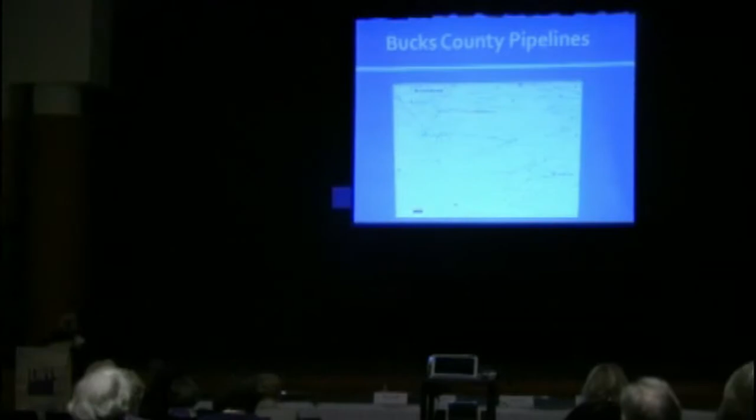Here you see some of the interstate lines in Bucks County. The blue lines represent those for natural gas, and the red ones for liquid products. You see they generally run east to west, because gas can flow in either direction.

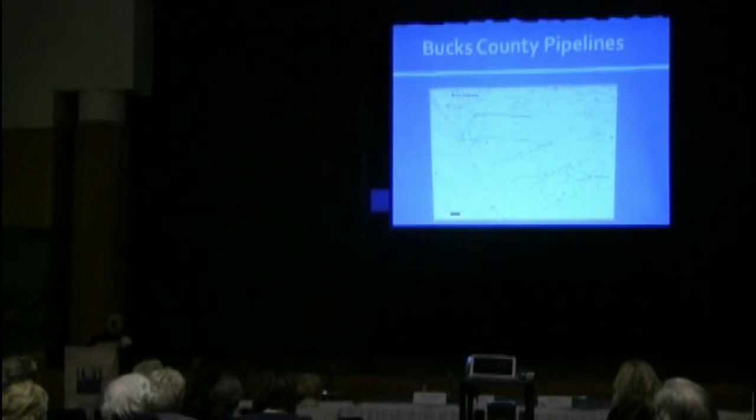These are some of the planned pipelines, and that little policeman on the slide is there to alert you that these are some items which you may want to spend your attention in reviewing. Planned pipelines is one of them.

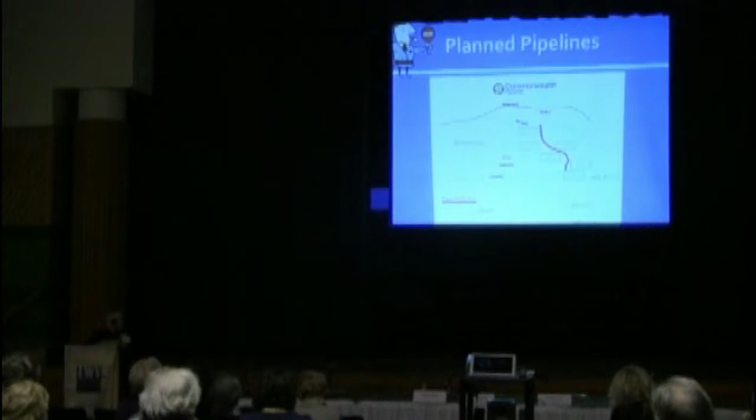Based on the increase in natural gas production, there are more transmission pipelines on the way. This is the best way to get the gas to the customer. Many of these new and expanded lines will be routed through our communities.

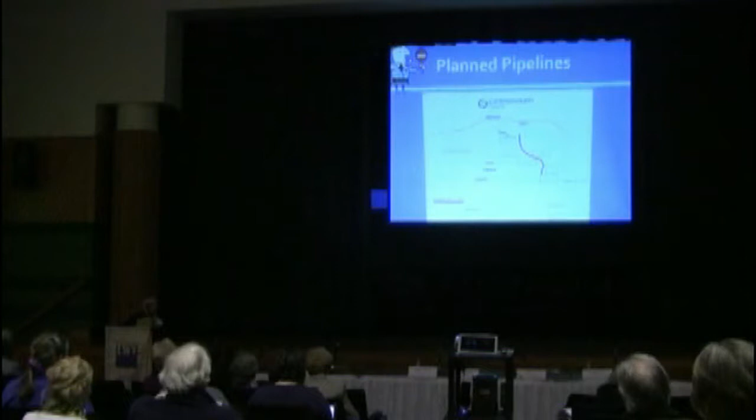There's also an East Side expansion project of the Columbia Pipeline in process that's upgrading facilities in this county as part of their efforts to transport natural gas from Pennsylvania to customers around the world.

There are also a lot of shorter lines that run from natural gas wells to other facilities. We don't have a map of all the natural gas lines, but we know there are well over 2,500 miles of them currently in the Commonwealth.

In this map, showing the lines in Bradford County, we see nearly 600 miles that have been completed, with more than 300 more miles planned. Most counties with shale development are developing a similar infrastructure.

In rural areas, these do not fall under state or federal jurisdiction. Thus, they are unregulated by government agencies for safety. There is no outside oversight of the construction process. And for your information, if you're out in the woods, you may want to be aware that there will be no smell if there is a leak.

There are also, part of the natural gas operation, pipelines that bring water to the site and can also be used for flowback fluids. Sometimes pipes are used to transport wastewater into pits or tanks for later disposal or reuse to frack other wells and other parts of the pad as needed.

These temporary lines, often made of plastic, can be in place for a year or more. They are also unregulated and could pose potential risks to land and water if leaks occur.

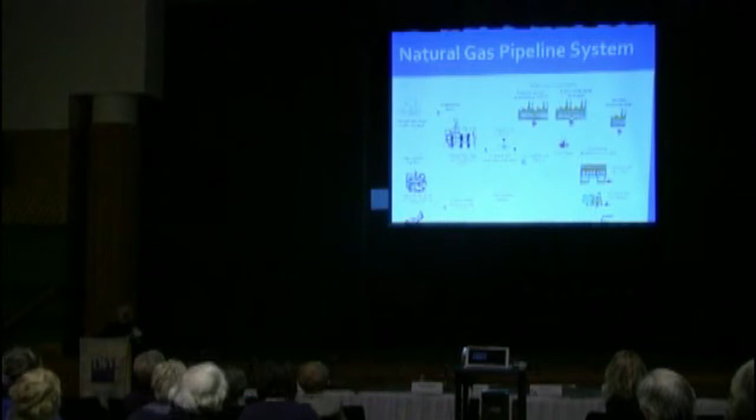This is a rural area of Pennsylvania where gathering lines are being built to carry gas from the wellhead to other processing plants or transmission lines. Sometimes these pipelines can be as big and operate under pressures as high as interstate transmission lines.

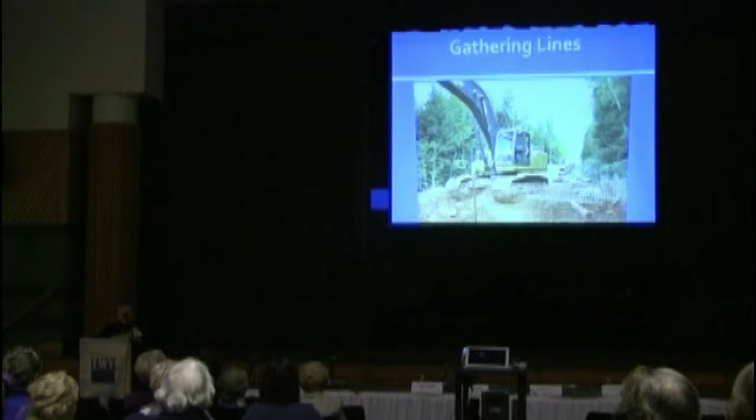These are compressor stations. These are large buildings holding huge engines and other equipment that regulate pressure and remove impurities to keep the gas moving safely and efficiently. They run 24/7, sometimes operate with a lot of noise and can also be a source of air pollution.

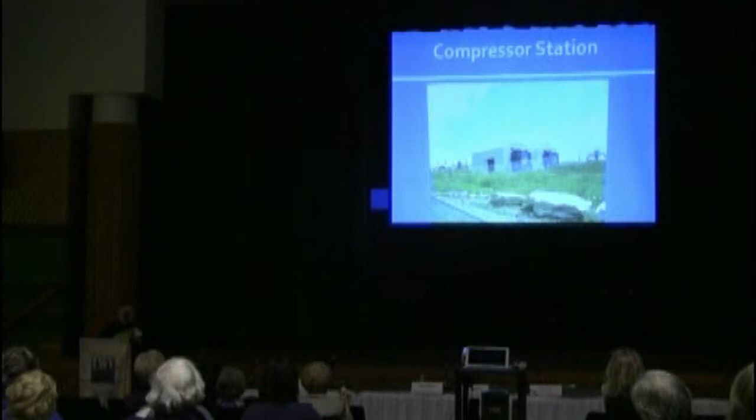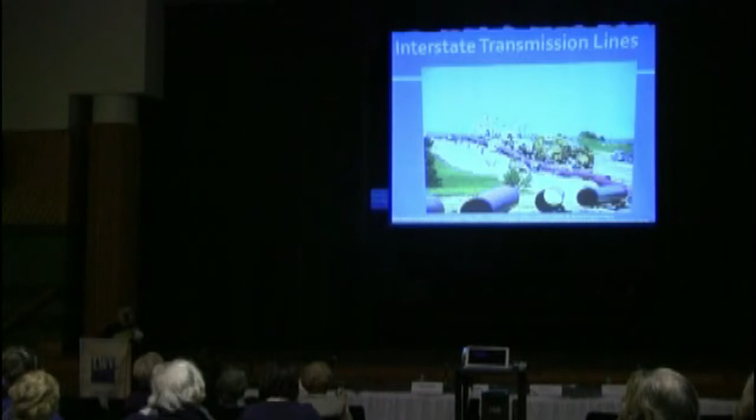Because the demand requires it, here are the large interstate transmission lines. They carry natural gas from one state to another. They can be large and operate under high pressures, as high as 1,800 pounds per square inch.

Control centers, or SCADA, which is an acronym for Supervisory, Control, and Data Acquisition facilities, monitor natural gas flow in pipelines. They can note if major leaks occur, and in many cases act to remotely shut off valves to stop flow and prevent major disasters.

The city gate is where pressure is reduced so that the gas can flow without problems from the larger transmission lines to the smaller distribution lines that run underground to our homes. This is where mercaptan, or that rotten egg or skunk smell, is added for safety reasons to give methane that foul odor that warns you of a leak.

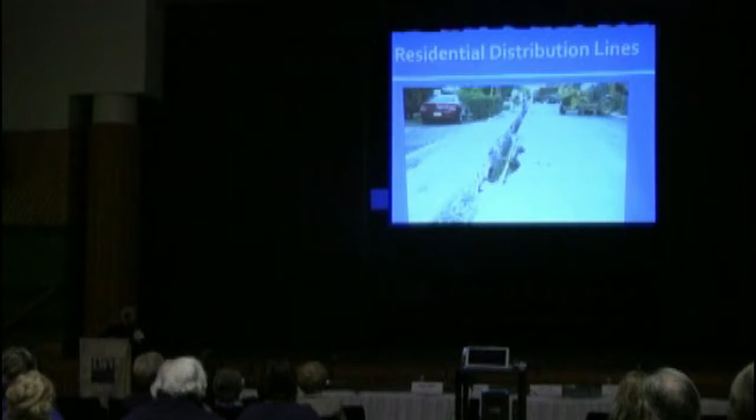To protect the public, emergency responders need to be prepared, and residents need to know and understand what to do in case they smell gas. Company plans show that safety and repair records are required to be on file with all government agencies. However, in Pennsylvania, they are not available to the public, even under the right to know law. As some of you may know, methane is more than 20 times more effective in trapping heat than carbon dioxide.

So, as you know, the League's mission is to encourage informed participation that guides policy decisions. We hope that what our speakers will share with you will make a difference.

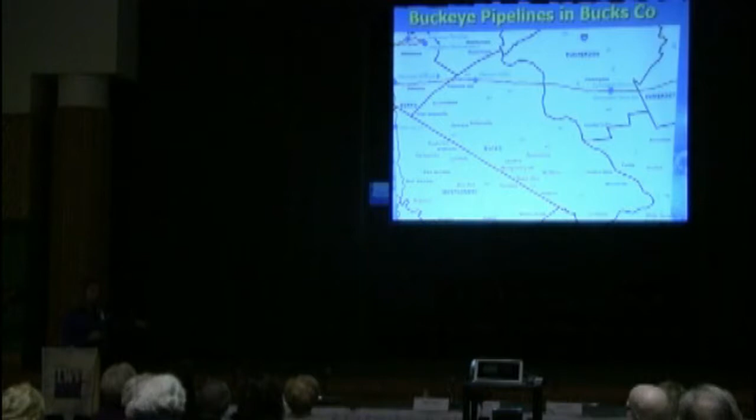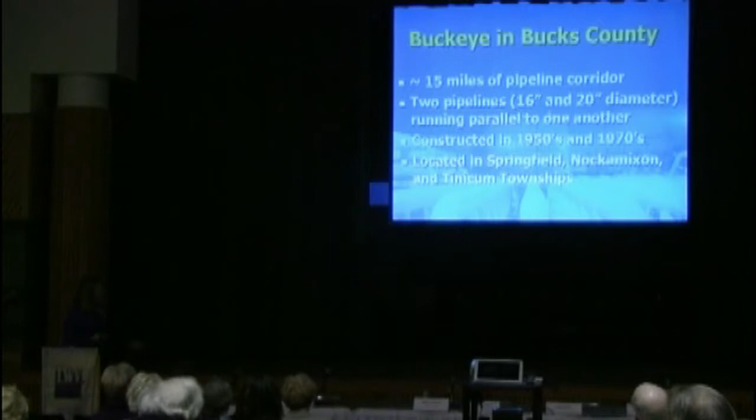In Bucks County, you can see we cross the northern part of the county. We are the red line. That is actually two pipelines that run parallel to each other between Macungie and Linden, New Jersey, about 15 miles in Bucks County. The two pipelines that run through are 16 inches and 20 inches in diameter. They were constructed, one in the 1950s and one in the 1970s. They're still running, so these are things that have longevity if they're operated, maintained, and inspected properly. We're in Springfield, Nockamixon, and Tinicum townships.

These don't show up very well at all, unfortunately, and I don't know the area well enough to tell you exactly what that would look like if I had better information. But we are here. I might just skip through this part a little bit. Those of you who are near us or have questions, feel free to talk to me afterwards and I can get you a little better intro.

But basically, in Nockamixon we run right behind Palisades Middle School, behind the school from the road you came in on.

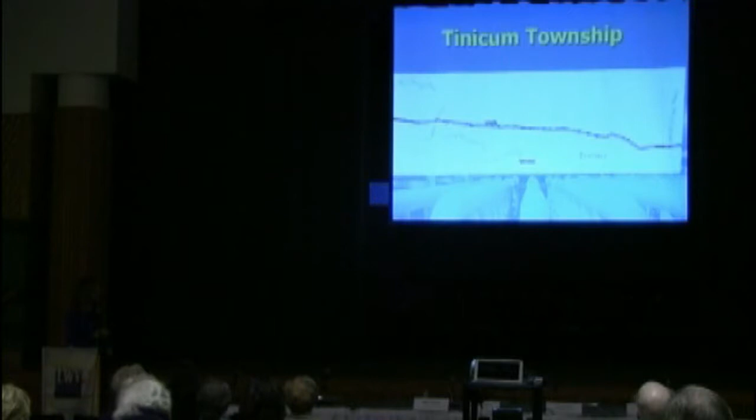One other resource I want to point out to you that is a resource for pipelines in your communities is the National Pipeline Mapping System. It is a website that is part of the Department of Transportation. It has resources that allow you to get shapefiles and other maps showing pipelines in your community. They don't go to a scale that you can see your house, but they will have roads and enough information for you to have an idea of what might be in your neighborhood.

A little bit about Buckeye's transportation system. As I mentioned, we are not affiliated with any major oil company. We don't own the products we transport, we are a middleman, kind of like FedEx or UPS, we just ship it. It's not our product, we are under contract with many parties to send these products around the country.

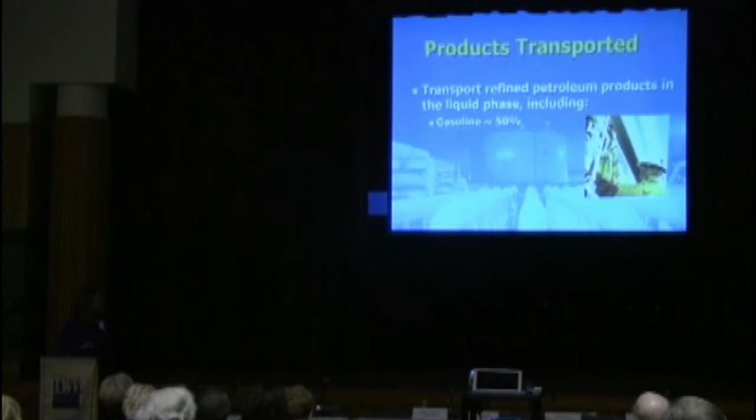Pipelines operate year-round, every day of the week, unless we're in the middle of maintenance functions. As I mentioned earlier, gasoline, jet fuel, diesel fuel, heating oil, and kerosene are our primary products, gasoline being the majority of that. We don't ship natural gas, which means if in any case of emergency you smell that rotten egg odor that Roberta mentioned, it is not us. Just be aware, if our product is in the vicinity, it's going to smell like gasoline, there will be some type of odor associated with that, just like when you're at the gas station.

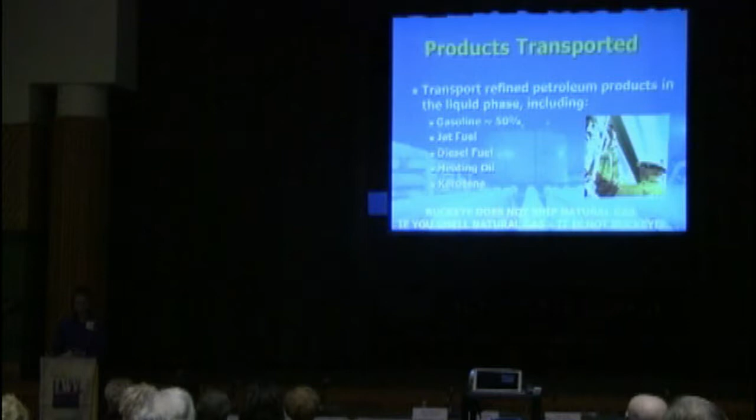Information about how the products run through the pipelines. On any given day, there will be lots of things in a pipeline at one time. We batch products behind each other. So we have a customer a state away that needs gasoline, that may be in the volume that we need to ship today. At the end of the gasoline, diesel fuel comes right behind it. These are pressurized lines, it pretty much stays in the order you put it in the pipeline until it gets to the other end. There's a little bit in the middle where it mixes.

We take that out, and some of it can be downgraded to a lower type of fuel that one of our customers can use, and the rest gets processed back to a refinery and turned into new product again. From an emergency standpoint, that's something we always have to be tuned into, because if there's a leak, it could be one of several products, and our operator will always be able to identify what it was at any given location. Emergency officials are also tuned into this because different products have different flashpoints and that type of thing you need to be aware of in responding to any potential incident.

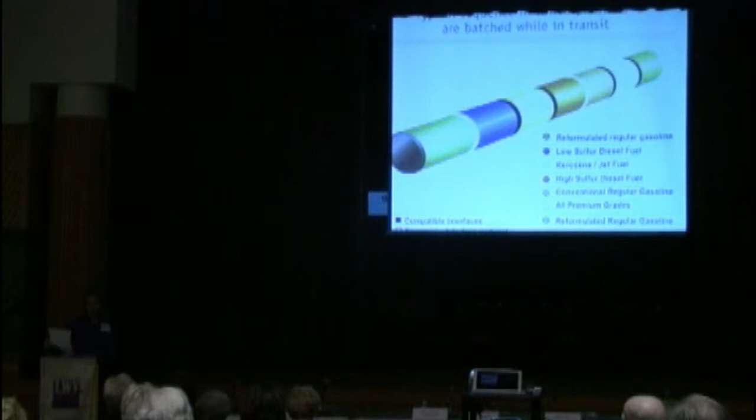We touched on this quickly earlier. Control centers are where the pipelines are monitored. Ours is in Breinigsville, right outside of Allentown. We have operators there around the clock watching SCADA systems for volume, temperature, pressure, and many other indicators on all of our pipelines.

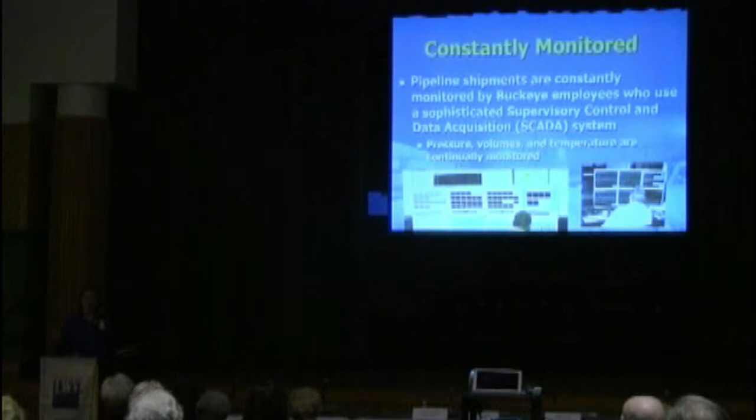These people are well trained to know what types of anomalies in that monitoring indicate the possibility of a problem. Especially at Buckeye, every single one of those people is trained from the first minute they walk in the door that it is 100% their right, obligation, and duty, if there's anything that looks remotely questionable, that they're not comfortable with, to shut it down. That is drilled into the culture of Buckeye, which, as someone who's not in that position to make the call, I'm still really appreciative of as someone who works for the company. There is no question that if there's a possibility of any issue, it's done.

As far as the pipelines run through your neighborhood, we have right-of-way patrols. The length of these lines is constantly monitored. We have air patrols that are our primary way of monitoring, looking for vegetation changes, pooling of liquids, etc. There's also valves, as we alluded to earlier, that can be shut off in the control center. Pilots fly these right-of-ways at least once every 2 weeks, some locations more so, to monitor ground conditions. They also look for things like backhoes sitting near the pipeline, to be aware of possible work that's being done that we're not aware of.

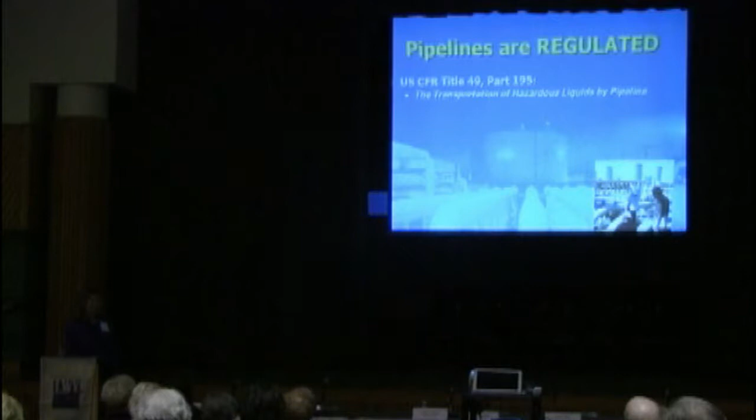Pipeline regulation: we are regulated through the Department of Transportation, Title 49.195, hazardous liquid pipelines, that's us. PHMSA, the Office of Pipeline Safety of the Pipeline and Hazardous Materials Safety Administration, is our regulatory body, and we are inspected every year by them.

There's lots of on-site inspections at our facilities. They monitor our operations on an ongoing basis. If there are questions about anything, they especially look at our records. As much as they're worried about the state of things, they very much inspect our records to make sure every single piece of required maintenance is done and documented to a T.

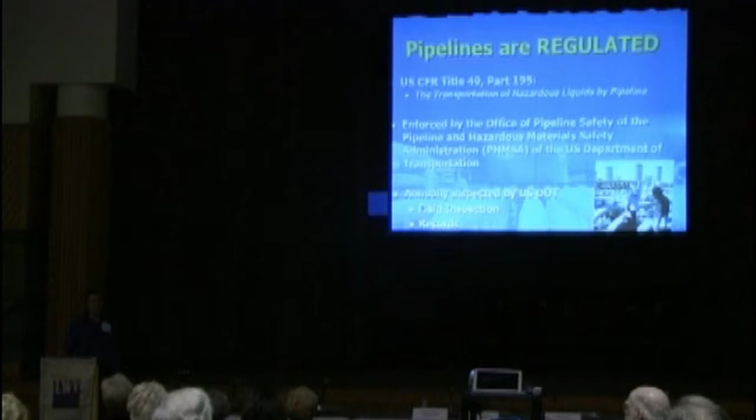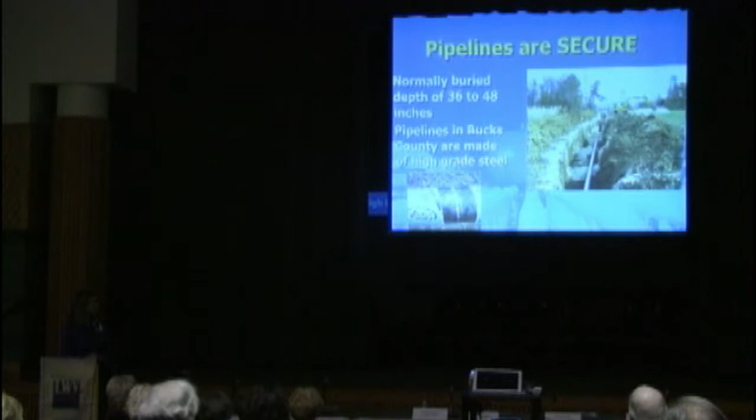In terms of the security of these lines, in general, they are buried 3 to 4 feet below ground, typically made of steel, and they usually have a cathodic protection system on them that prevents corrosion. Basically, it induces an electrical current which will corrode material other than the pipeline in case of water. It's also a way that we test to make sure the condition of the lines is intact.

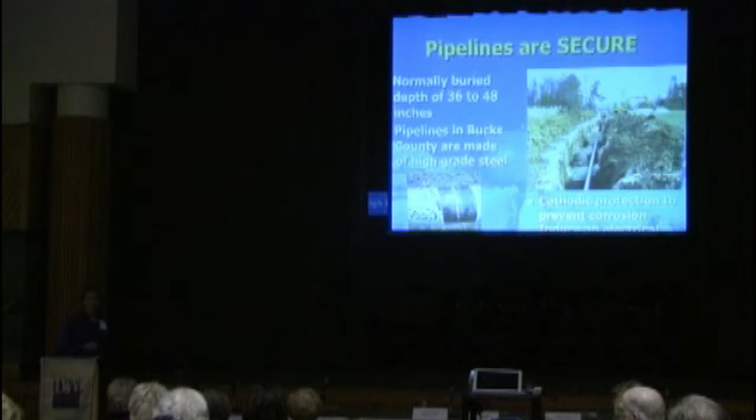Just a warning on the depth of those lines: sometimes they are much deeper, sometimes much shallower. We have lines less than a foot deep in certain places, which are all issues we try to address. But they are not always as deep as you might think. Lines were put in, say, 60 years ago, and erosion, farm fields tend to have soil changes over the years, so that's always a factor to keep in mind.

In terms of integrity, we are required to inspect our pipelines, and we would do so even if we weren't. The device we use is called a SmartPig. It's a highly technical instrument run through these pipelines, with sensors that detect any kind of changes in the surface of the pipeline - nicks, dents, scrapes, corrosion, that type of thing. These inspections are done at least once every 5 years.

Basically, this just flows in line with that series of products you just saw, and it will take tons of data about the condition of that line. Here's kind of what one looks like being put into a pipeline - that's probably, I'd say, 20-inch diameter, something along those lines. It has magnetic sensors all around it that are used to examine the inside of that pipeline for any anomalies.

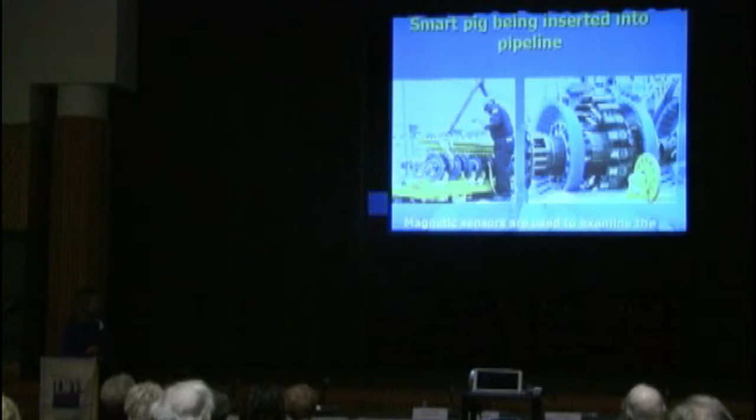Those are odometer wheels on the bottom of it that let us figure out exactly where in that pipeline it is, so that afterwards we come back and say something here didn't look quite right. We can find exactly where that location is on the ground, and every year we have tons of these where slight things trigger a duty on us to go out in the field, dig it up, inspect it, investigate what might have caused what we saw in the data, and repair anything that is questionable.

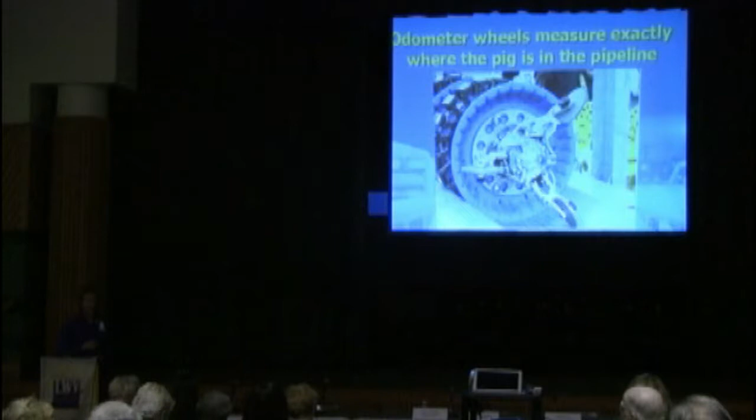Just a little bit about what we do in terms of communicating with the community. There are 4 key groups that we communicate with: the public, forums like this, emergency officials for things like emergency response, planning with them, going through drills just to be prepared, and local public officials, who we work with in terms of planning projects.

Frequently, one of the things I get involved in is developers who are building things near our pipelines. Sometimes we need to be working with developers or municipalities to help development stay clear of hazardous liquid pipelines, because they don't always go hand in hand. And excavators, of course, because any kind of construction near these lines is one of the biggest risk factors for an incident happening.

The messages we communicate with all of those people include: how to recognize a leak, the one-call number to call before you dig, what pipeline markers look like, how to communicate with our company, things you can and can't do within the pipeline right-of-way, and things to look for in case of a release.

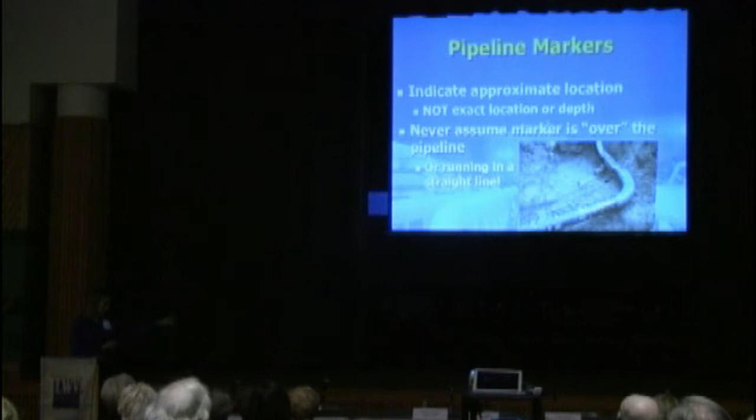They don't tell you the exact location, so they're not perfect, and they don't tell you the depth. This is just a reminder that these things are not always in straight lines, so if there's a marker over there and a marker over there, it doesn't mean connect the dots necessarily. That's kind of what our right-of-way looks like, or we would like it to on a given day. We try to keep them clear so that any issues can be spotted and that we have quick access.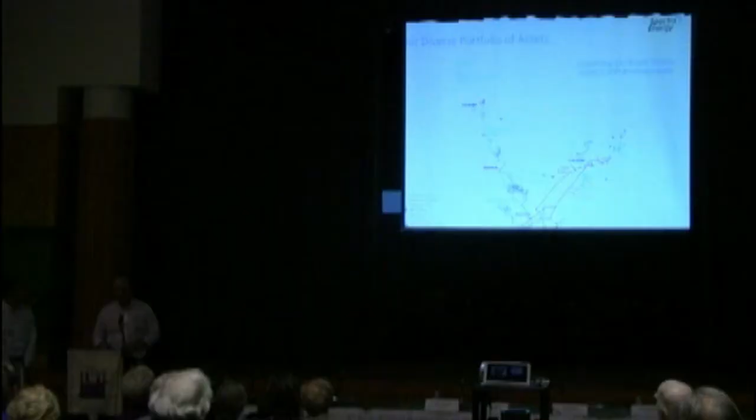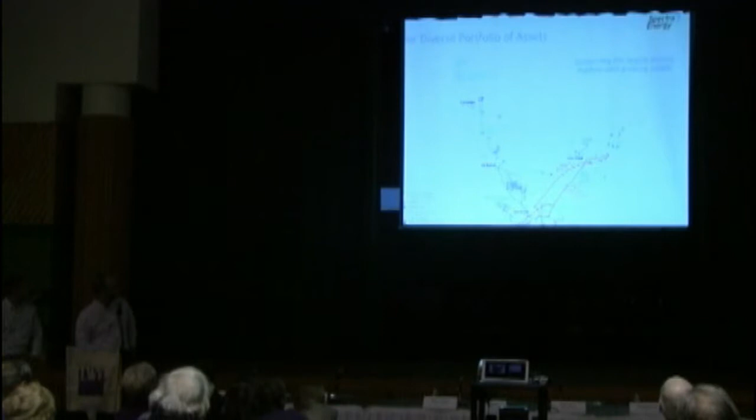Spectra Energy Corporation - our facilities are basically all throughout North America. We have facilities that run from Houston, Texas, up through Nova Scotia, Canada, and that's our natural gas system. We also operate in Western Canada and Central Canada, Ontario.

So basically, Spectra Energy, as an overview, is a natural gas transmission company. We own, operate, and maintain about 22,000 miles of natural gas transmission pipelines throughout the U.S. and Canada. We transport natural gas from the supply to the market. So kind of as Beth said, we're kind of like a FedEx, kind of like a UPS - we don't own the gas, we just own and operate the pipelines, and transport to local distribution companies such as PECO, UGI, things like that.

In Pennsylvania, we're known as Texas Eastern Transmission. Some people may know us as Texas Eastern Transmission. We've been in Pennsylvania since the company started in 1947. The pipelines were actually part of the War Emergency Program in the early 40s to get oil from the Gulf of Mexico and Texas up to New York. So Texas Eastern purchased those pipelines from the government in 1947 and turned them over to natural gas.

Our CRP system runs through the southern part of Pennsylvania - that's two pipelines, one a 20-inch high-pressure natural gas line, and the other a 36-inch high-pressure gas line. Our Penn Jersey system, which is up in this part of Bucks County, is a 3- and 4-line system. The lines range anywhere from 24-inch to 36-inch, and they operate at 1,050 psi. As you can see, we have over 2,000 miles of pipelines just in Pennsylvania.

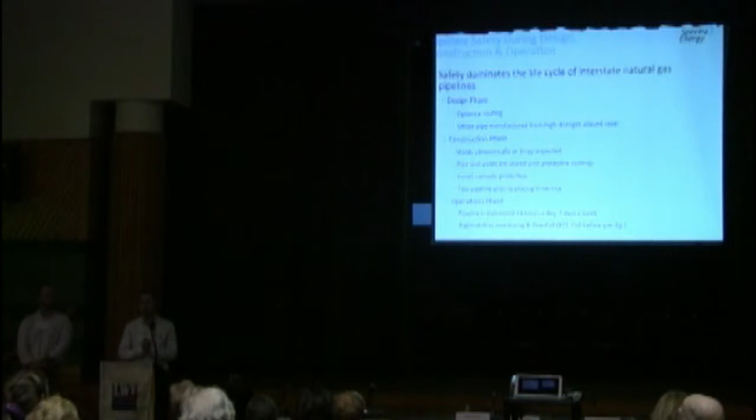The Federal Energy Regulatory Commission, FERC, is our regulating body. For most projects, we participate in FERC's pre-filing process, which is a voluntary process to get the community, elected officials, and basically all stakeholders involved in the permitting.

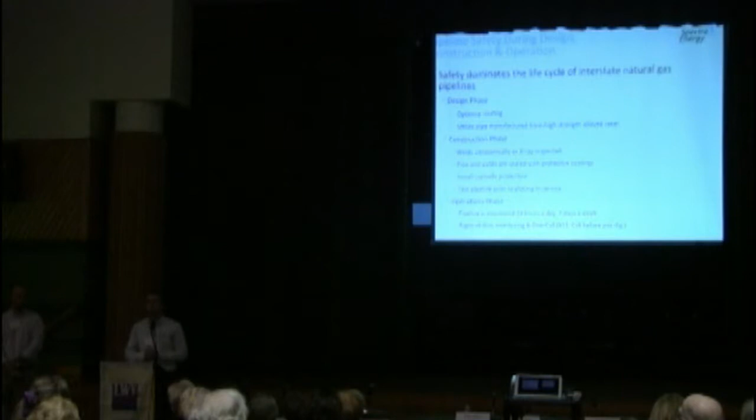When we're looking at new projects, just getting into the design phase, we don't route pipelines overnight. It's actually a long process, months, even years sometimes. It's important to optimally route the pipeline so we can manage our environmental footprint, and we like to work with stakeholders to address any issues folks might have.

Beyond routing, when we're actually purchasing pipe to install, we use high-strength alloy steel. We go out to the factory and have our own inspectors on site. The manufacturers have their own rigorous standards, but we send our folks out to oversee the pipe as it's being rolled.

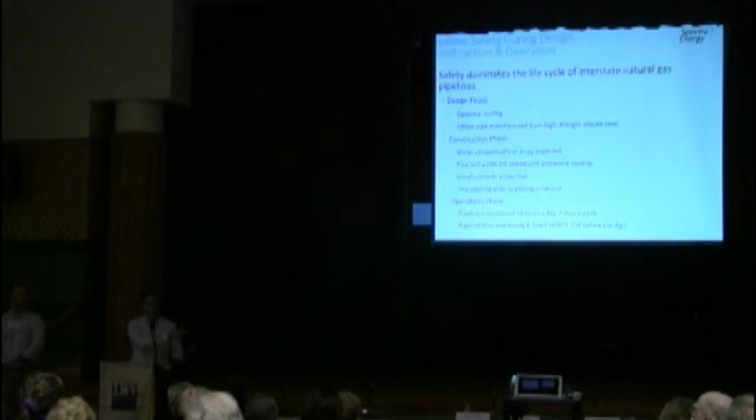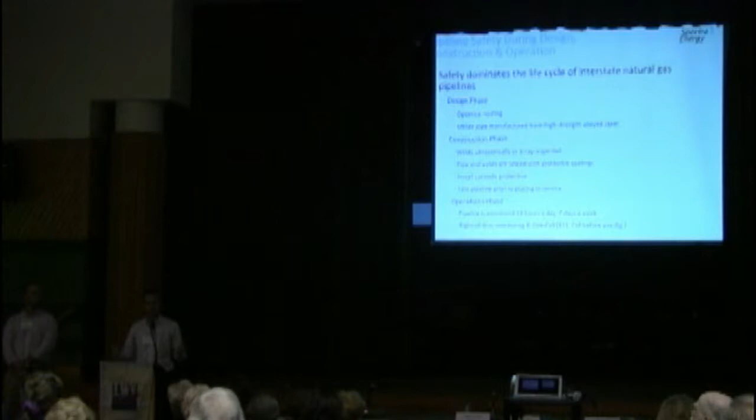As that pipe is rolled, they weld longitudinal seams, and those seams are ultrasonically, or X-ray, tested. Before that pipe even makes it out to the field, they test every weld to make sure it meets our strict standards, and if there are any issues, that pipe never makes it to us.

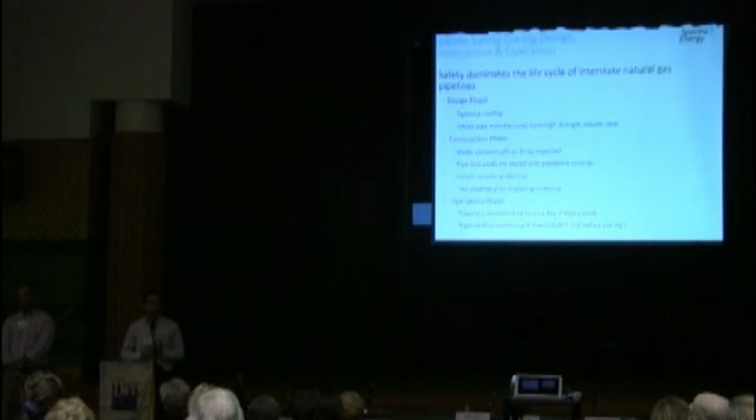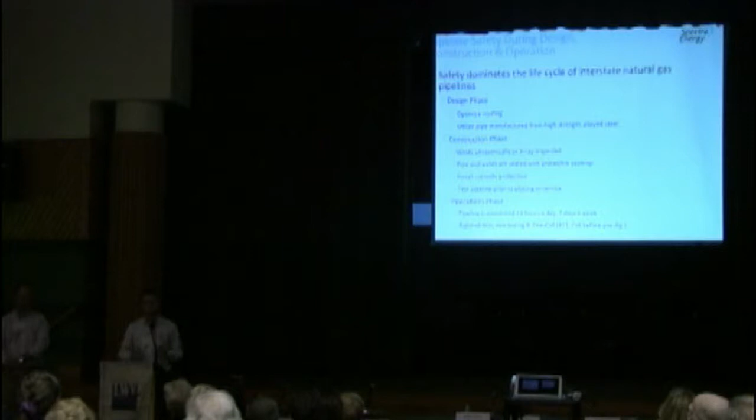Once that pipe makes it out to the field and we get to the construction phase, our welders are all tested before they're allowed to work for us. We make sure they know what they're doing, and beyond that, when they're welding, we X-ray and inspect all of the welds out in the field before we place that pipe into the ground.

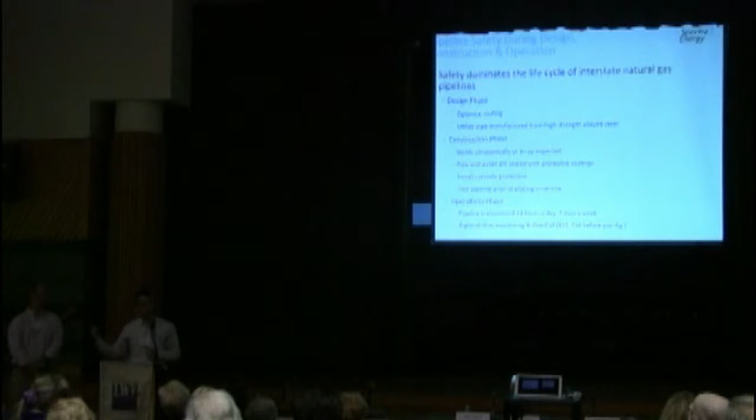Before we place the pipe into the ground, we also place a protective coating on the pipeline, and we install cathodic protection, which Ryan will explain later in our presentation.

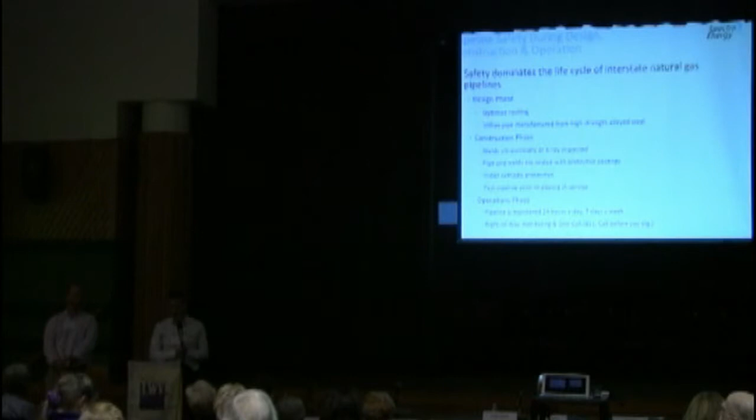Once the pipe is lowered into the trench—our pipes are a little different than product lines—they're buried at a minimum depth of 3 feet from the top of the pipeline to the surface. That's the minimum; pipes can be quite a lot deeper depending on circumstances in the area.

Once the pipe is in the ground, we test it. We hydrostatically test it, filling the pipeline with water and bringing it up to about 1.5 times the pressure the pipeline will operate at. The pipe has to maintain that pressure for a period of 8 to about 24 hours. If there are any issues, we'll identify them before we place the pipeline into service.

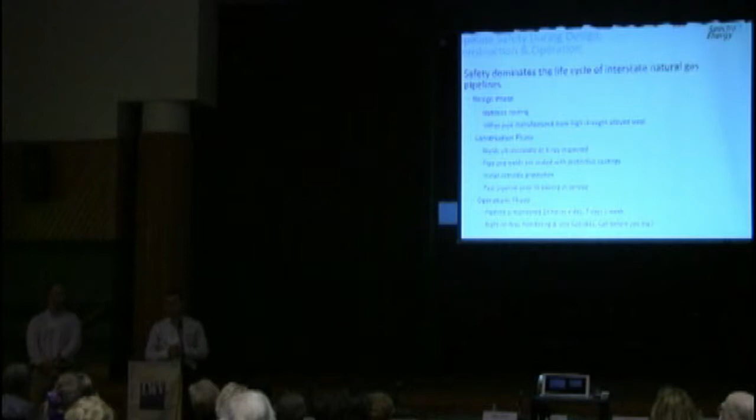Once the pipeline is in service, similar to Buckeye, we monitor it from our gas control center using the SCADA system. The pipe is monitored 24 hours a day, 7 days a week. If there are any changes in pressure, whether a spike or a drop, we have remote control valves along our entire system that let us close in the pipe with the push of a button, and we have folks like Brian and Pete who can go out and inspect the issue and figure out what's going on.

Beyond that, similar to Buckeye, our right-of-way needs to stay cleared. When I say it needs to stay cleared, you're not allowed...

We don't allow houses or barns on top of our right-of-way. You can still farm on top of it, still grow crops for the most part. But we need to be able to inspect the right-of-way, whether from the air or by Brian and Pete actually going out and taking a look, to make sure there's nothing happening on the right-of-way that shouldn't be going on.

That kind of dovetails into the 811 call-before-you-dig system, which we have a presentation coming up later to cover, so I won't get into it in detail. But as part of our own internal public awareness program, we work with first responders on a regular basis to make sure they know our presence in the area and that they're trained should anything come up.

Beyond that, anyone who lives near our pipeline receives mailers on a regular basis. I know we all get a lot of junk mail, but it's important that if you see anything from a pipeline company that mentions calling before you dig, hold on to it, because there are important phone numbers on there.

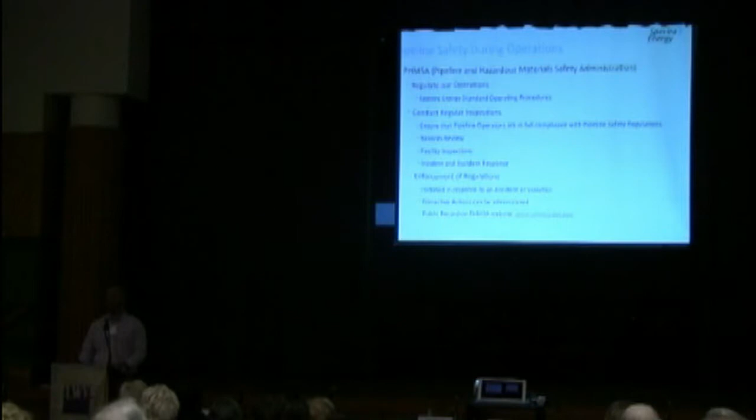PHMSA conducts regular inspections. We usually have at least one, but often multiple inspections throughout our company each year. A lot of times they'll do a large record review in our Houston office, and then they'll send inspectors out into the areas and do another thorough record review there.

They would come to an office like this area office where I work, and I'll sit with the PHMSA inspector for upwards of a week or two. We'll go through records and take facility tours. They can look at basically anything we have - the right-of-way, to make sure we have visible pipeline markers, and our standard operating procedures, to make sure we're doing what we say we're doing and documenting everything. So PHMSA is very, very involved in our operation.

PHMSA would also come out if there was any kind of incident or accident, and they'd be involved in that as well. They enforce regulations - if there's an incident or accident, they could enforce a violation upon us, or any company for that matter. If we're not living up to our standard operating procedures, PHMSA can apply a fine as they feel necessary.

On the PHMSA website, anything they find against a company is public record. You can go on PHMSA's website and they list everything going back to the 1980s, and I believe even farther - it's all public record. So if you ever want to take a look, you can see where pipelines are in your area with the mapping tool, and also see what pipeline companies are doing in the area.

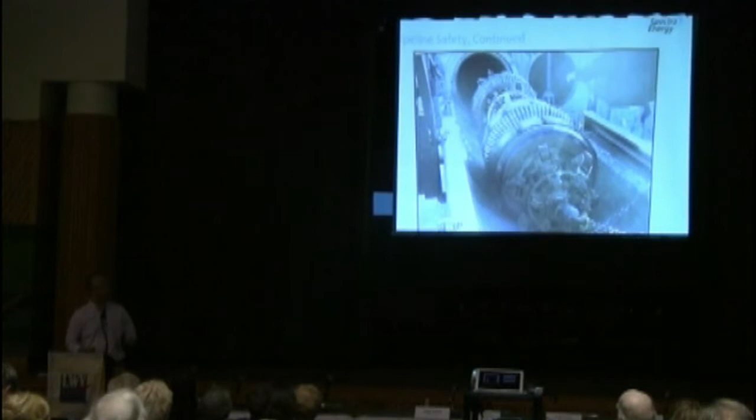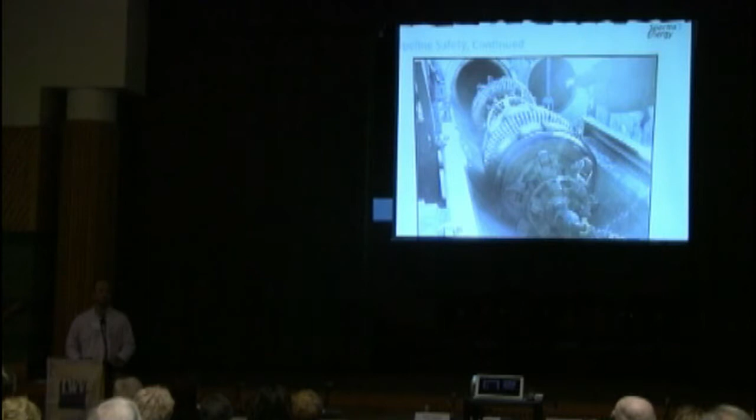What it does - Beth explained it, so I won't go through it in detail again - but it's going through the pipeline checking for any corrosion, any indications in the pipeline. If there's anything there, we'll go inspect it. Our pigs can be run three different ways.

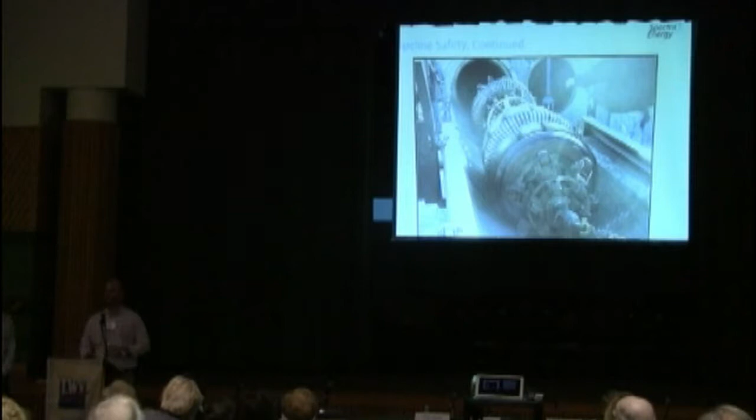They are run with natural gas, we can run them with nitrogen, and we also have certain facilities where we do a wireline pull. Basically, we set up a big truck and air compressor on one side, hook a wire to the pig, and pull it over to the other side. A lot of times we'll do that with certain crossings at rivers, so most of our lines are run with natural gas.

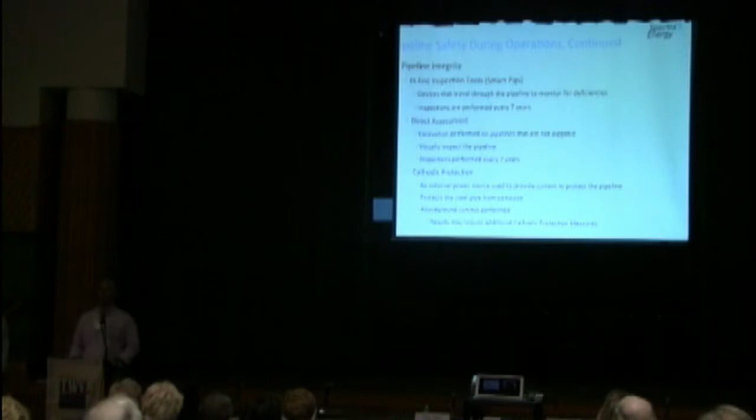We also have a direct assessment program. Not all of our underground lines are pigged. We have certain valve sites and meter stations that have smaller pipe crossing between the lines, anywhere from 6-inch to 10-inch or 12-inch, that a pig can't run through, so a smart tool can't get data. What we actually do is dig these sites up, visually inspect and put our hands on the pipe, remove the coating, inspect the pipe, and then recoat it. So for lines that are not piggable, that's how we take care of that.

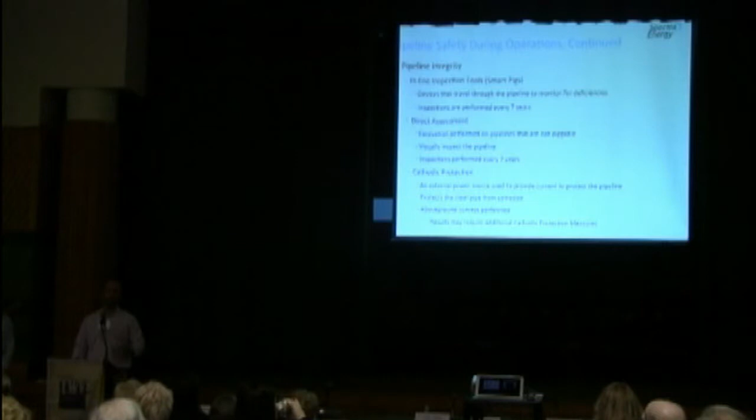As far as our cathodic protection goes, we touched on that a little bit. We're checking the pipe, protecting it from corrosion, protecting the steel from corrosion. We also do above ground surveys where we can check the coating on the pipe, and from that data we'll go out and make any repairs if we have to, and add other cathodic protection if necessary.

No, our presentation's a little shorter than best. We thought the Q&A was part of our 15 minutes, so we'll stick around and answer any questions anyone might have about the presentation. Thank you.

So I guess we have 10 minutes.

Our next speaker this evening is Faith Zerbe. Faith is a member of the Delaware Riverkeeper Network, and she's been part of that since 1999. Prior to that, she spent a number of years as an assistant staff scientist with a private environmental consulting firm performing natural resource damage assessments related to oil spills. She assisted with the development and planning of habitat enhancements and restoration projects to compensate for natural resource impacts and helped assess environmental impacts from oil spills. Faith directs the Delaware Riverkeeper Network's monitoring program, and she's responsible for water quality data analysis, monitoring study designs to bolster the Riverkeeper's science, advocacy, and legal work, and recruiting, training, and maintaining a strong citizen volunteer monitor team throughout the basin. Faith has a Bachelor's of Science in Biology from Ursinus College, so she's local all the way. So welcome, Faith, please.

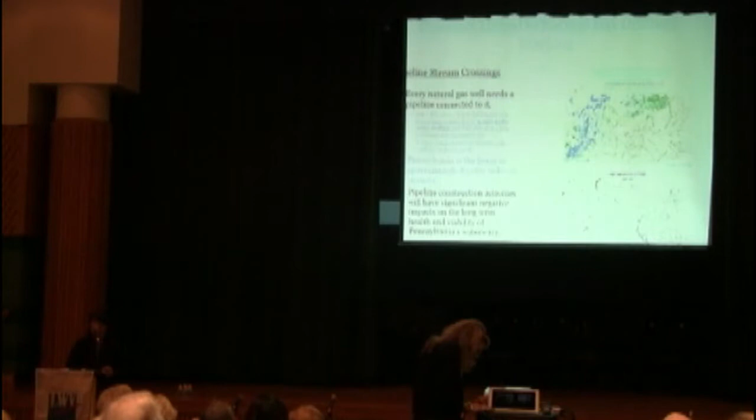And 2,907 wells were drilled that year. During that time, the state agency, the DEP (Department of Environmental Protection), detected 4,382 violations during their inspections. Again, these are just numbers that come from the DEP.

Because Pennsylvania has more stream miles than any other state—over 83,000 stream miles—as linear pipeline projects get cut across the basin, whether gathering lines or large interstate lines, there are a lot of wetlands and water bodies that get cut through and have to be crossed in some manner. So we have a lot of concerns at Delaware Riverkeeper Network that it's done in a way that limits the harm as much as possible.

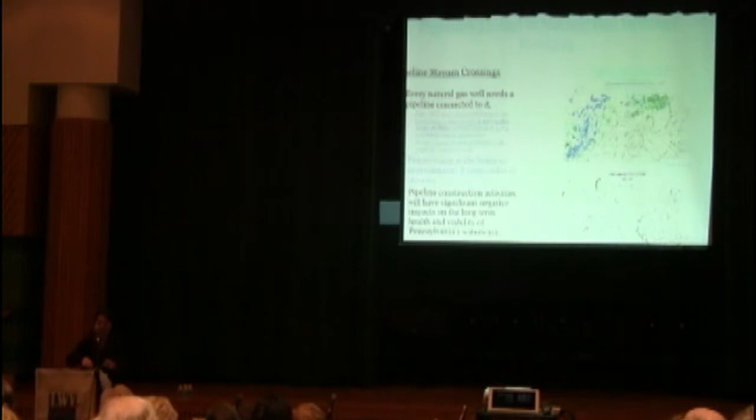This again is the Delaware River Basin, over 13,000 square miles. Here's Trenton, here's Philadelphia. The headwaters start up in Hancock, New York, and we're drinking water supply for over 17 million people, which is why we really care about how pipelines and gas drilling commence or do not commence in the Delaware River Basin.

Part of 4 states—you can't see this very well, but the reason the Delaware River Basin Commission and others were concerned about drilling is because there's basically a line right here, and all of this area of the watershed has Marcellus shale underneath it. Even where we are here in Nockamixon Township, I believe it's the Lockatong Formation as well. A lot of the drillers will go underneath—they're going into Utica, they're going into other shale layers as they look at this unconventional way of drilling.

So there are a lot of places that could have drilling eventually. But because of this, as biologists, as people working on watersheds, if we don't protect our headwaters, if we don't protect our forests, we're not going to have water to drink. So we had a very big concern with gas drilling and how it would proceed, if it would proceed.

So we have this map online because what we always struggle with at Riverkeeper is trying to figure out where all the pipelines are—there's a lot. Roberta and some of the other representatives showed some lines of pipelines, but we can never really see a very good map of where things are specifically. What this map shows is essentially there are about a dozen or over a dozen large interstate transmission lines, either proposed or already cut through the Delaware River Basin, just since the unconventional shale drilling began. There's a lot of concerns, and because they are so large and so vast, it's hard to get your head around these projects.

I don't live in the drilling territory—some of you are from the drilling territories, dealing with gathering lines and much more infrastructure than what we deal with here in the Delaware River Basin. But it seems even overwhelming for just the interstate lines. That's our perspective with all the lines coming in or proposed, just trying to keep track of them, keep up with them, and comment when we can.

The other thing I wanted to point out here too—am I really loud and yelling at you? Okay.

The one thing I wanted to point out is segmentation, which pipeline companies do very well. You can see it right here. Pipeline companies will come in and do segments, maybe 9-10 miles of a pipeline segment at a time. Here you'll see red, then yellow, then red, then yellow, then red, then yellow.

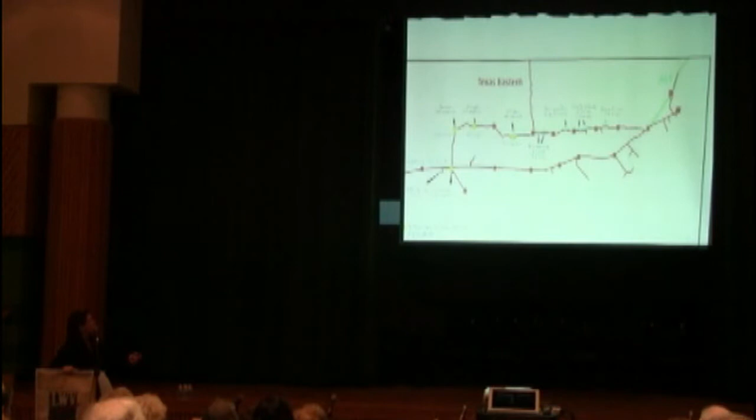So I'm just going to scroll through here. All right, so here are our volunteer monitors. Again, Delaware Riverkeeper Network is a grassroots group, we have a watchdog component. I work with a lot of volunteer monitors. We would not be able to do what we do without incredible volunteers on the ground. When you're looking at a pipeline project, having landowners who live along the pipeline engaged and involved is really important - they know what to look for, they know what their rights are, and who to call when there's a problem.

So again, a lot of the pictures are going to be taken from volunteers who've taken pictures when they're out in the field. This is through High Point State Park, and I apologize, it's not real clear. This is a typical pipe yard, the pipes coming in on the trucks.

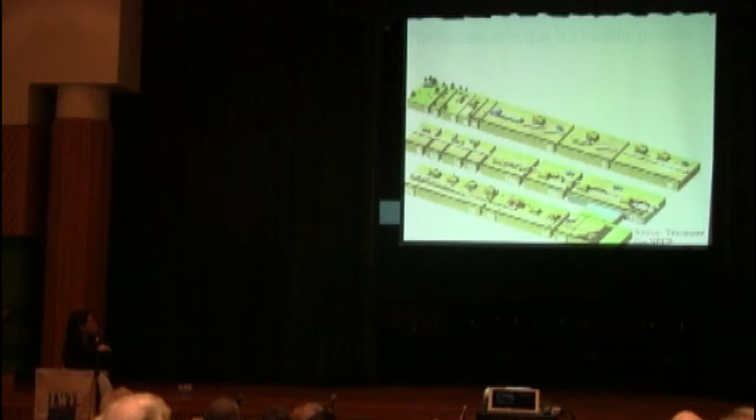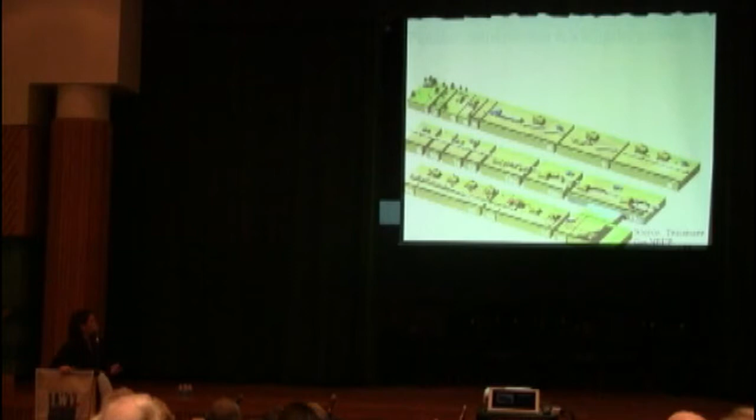So your typical construction sequence, again, you're going to start with tree cutting and tree clearing. There's trenching, there's blasting, depending on if you have a lot of bedrock. They have to pad the trench bottom, hopefully not with topsoil. There's stringing and bending of the pipe. Tennessee Gas outlines it in 18 different steps. So again, it's a process, it takes a lot of time. There's the welding, and then they put the protective coating on the weld. It all takes a lot of time, and it's actually pretty fascinating to watch.

Some of the things that we saw firsthand being out there in the field, we saw a lot of issues with environmental impacts and resources. You see a lot of pipelines moving into public lands and public areas, but what we saw was lack of signage. When the pipeline company goes through, they have to have wetlands delineations done. You can get wetlands delineation reports on the FERC website through the processing processes, but when you actually go out in the field, what you realize is things really aren't delineated. Even as wetland scientists, it's difficult to imagine if you're the person coming through and cutting trees, how do you know where the wetland is, or which trees, or where the right-of-way ends? Oftentimes when we were out there on sites where we had permission to go, it's really hard to understand, and we're right ahead of where they're cutting. It's just an interesting problem that we saw quite regularly with this pipeline construction project.

The other major thing we see, and we'll talk about methane in a little while, is a lot of issues with sediment and erosion. All of the wetlands and streams have to be crossed. This is your typical wetland crossing. They usually put timbers in the water, and that's considered a best management practice because it helps keep the sediment from getting really compacted. This is the travel lane, and here you'll see a wetland, or it might be a stream complex, and they've got the black fabric filter up too. In this case, they do not have the black fabric filter underneath. So these are the kinds of things that volunteers can be trained to visually look at in the field, to talk about and report the problems to the agencies.

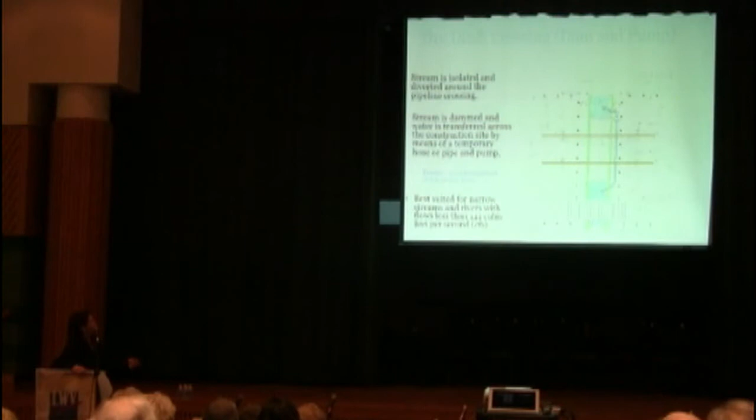This is difficult to see, but this is a diagram of basically a pump method. The pipeline goes across the stream, and the water is pumped through a pipe. Again, the idea is just to keep running water away from the construction site, so you don't have that sediment plume or sediment pollution. So that's one method to do it.

What we found in this project is they built these containments that were supposed to hold the water to do that diversion, to decrease the sediment getting into these high quality streams. But in most cases, they weren't using them. Partly what was happening is there's just a lot of flow in these streams going through, and as the flow goes through, if the straw bales aren't high enough, they'll overtop. So in a few instances where we could get access - we couldn't see everything all the time - we found these were actually being bypassed. So it looked good on paper, but it wasn't so good in reality.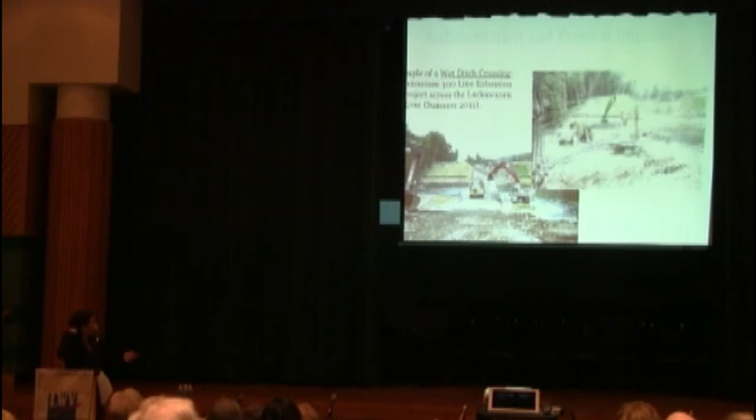And this is the beginning of the HDD entry pad. This is just an example, in the Lackawaxen. This was the 300 line, and you can see here this was a wet trench, and you can see where the sediment is pooling around the pipeline, in the water.

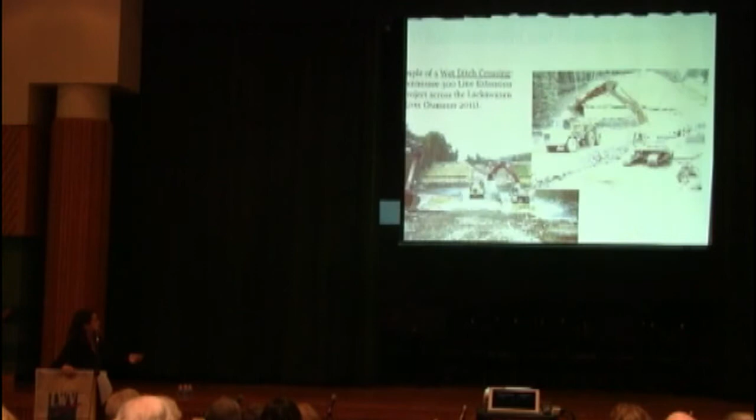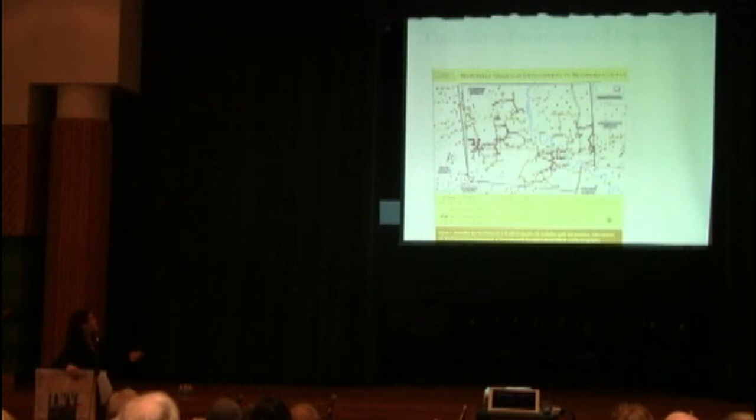So environmentally, we hope that they don't do this - we'd rather they go drill under. A couple more photos - I think I only have 3 minutes left. All right, then I'll end here.

This just shows you a cumulative impact for the Northeast Upgrade Project. It shows you, again, the linear nature of the pipeline, how many wetlands you have to pass through. I don't really have time to get into the public plans, but these are the different cumulative harms associated with pipelines, not to mention explosions. I have a lot more slides, but I believe I'm done for the evening, so thank you for your attention and time.

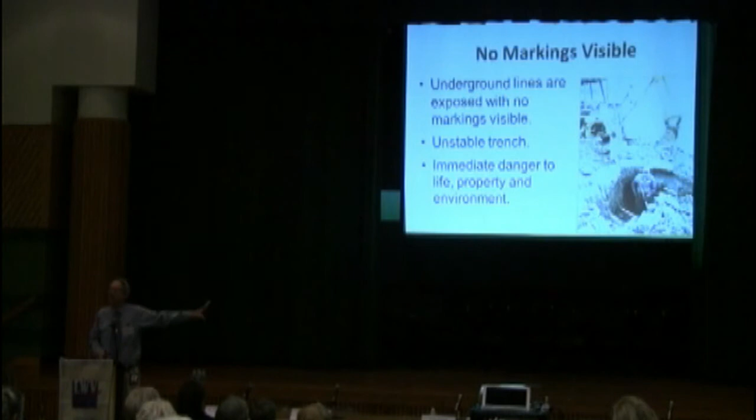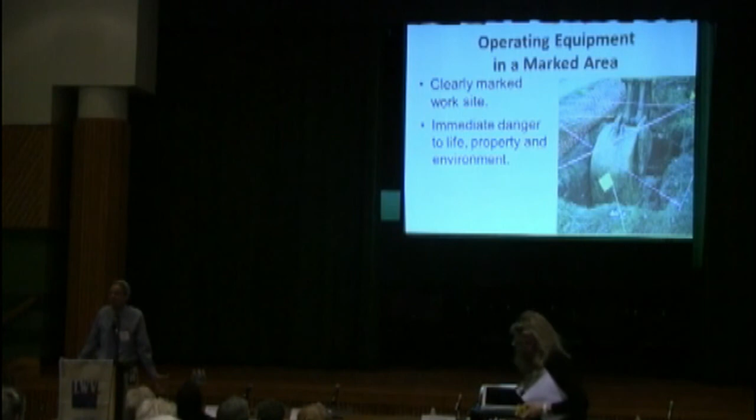So if you see that going on - you know, I wish you could see this picture, it's great. It's this old guy in the trench, right next to the lines. The equipment is right next to him, the soil is all piled up, and that thing is ready to collapse in on him. It can go like that fast. There's so much more in that picture, it's frightening. You see the backhoe going in there right next to a yellow flag - that's a gas line. It could be a Buckeye line, a Spectra line, anybody's line. It could be your line that's coming into your house.

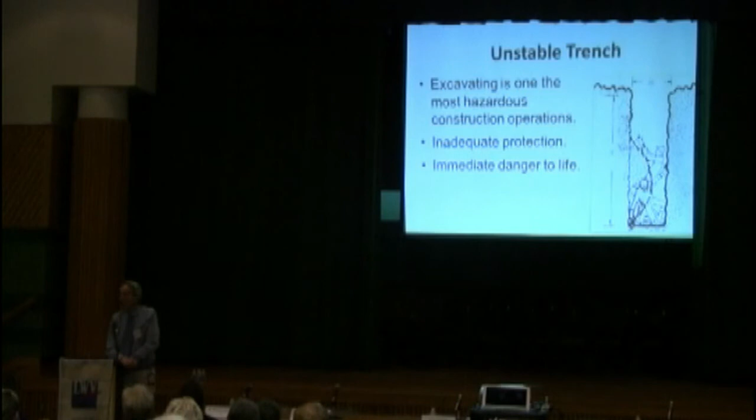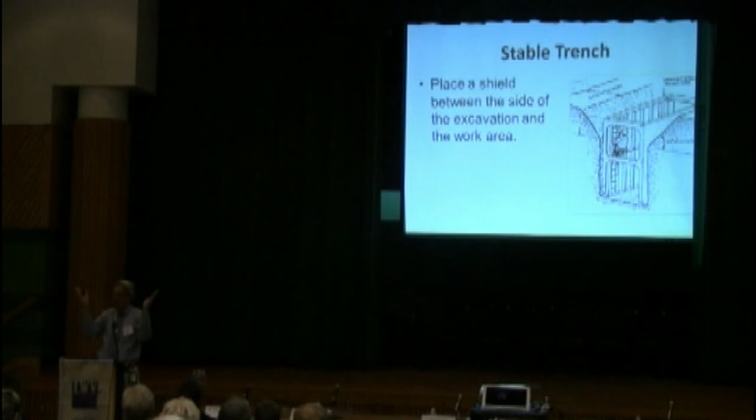That's what it's supposed to look like. You've seen these big boxes sometimes sitting on the side of the road - they slide right inside the trench to keep it from collapsing in. If they don't bring those in, a lot of times what they'll do is spread it out and move the dirt to the sides. That way it can't collapse in as quickly. So there are good ways to do it. That's the best thing you need to think about there.

So I guess really, the main things I want you to go home with tonight: first, I want you to grab the information I got out on that table. I got little brochures there to explain the process, they give you a list of the questions we're going to ask if you call in for an excavation. Take one of those plastic cards that are out there that have all the colors on there, so you're aware of what's going on, what the marks mean when they're on the ground. And lastly, I got business cards out there - it's got my cell phone number on it. Feel free to call me with any questions, problems, or confusions you may have.

Don't be shy. I don't just work for excavators and utility companies - I work for everybody in this business, and that includes you. I'll be happy to help you out any way I possibly can.